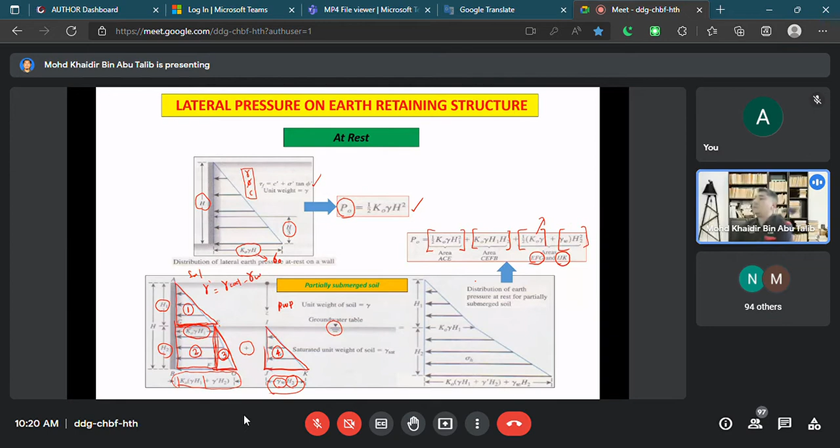Okay, this is example for at rest condition. Figure 13.6 shows a 4.57 meter wall, from A to C, that means the total height of the wall, and the wall is restrained from yielding. Restrained from yielding maksudnya at rest, no movement. Calculate the lateral force P0 per unit length of the wall, also determine the location of the resultant force, which means Z bar.

Assume that for sand OCR equal to 2. Dari previous class kita dah tengok macam mana estimation of the K0. Antaranya yang popular ialah Jaky equations, dan kita ada juga Jaky on sand, and we have Kulhawy and Mayne and so on. Dalam kes ini kita guna yang over consolidation ratio punya equation. Since given OCR equal to 2, kita masukkan 2, and from this figure kita dapat tahu phi is 30. Since phi is same 30, we assume we have a same soil, same phi. Kita masukkan phi 30, include OCR 2, power sin 30, kita dapat K0 equal to 0.71.

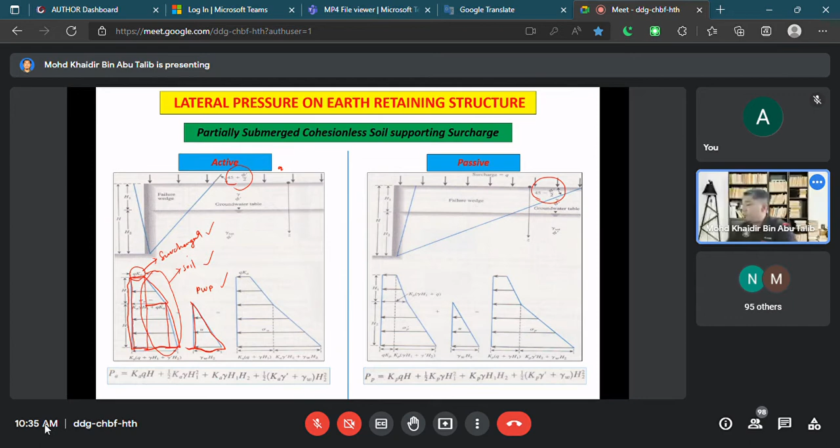Okay, let's look at an example. A 5 meter high retaining wall shown in the figure. Determine A, the Rankine active force, meaning force PA per unit length of the wall and the location of the resultant, Z bar A, for active. Then also PP, the passive force, and ZP. So PA, ZA, PP and ZP.

Since C equals 0, it means it's cohesionless. So the formula for the active is this, which is... this. Gamma Z here is sigma naught.

So first, to calculate this we need to determine the coefficient of active lateral pressure, KA. We have phi equal to 30 degrees, using this equation, or another equation you can use is tangent squared of 45 minus phi over 2. Either can be used, so we can use this one. So 1 minus sin 30 over 1 plus sin 30, and we obtain 0.33 for KA.

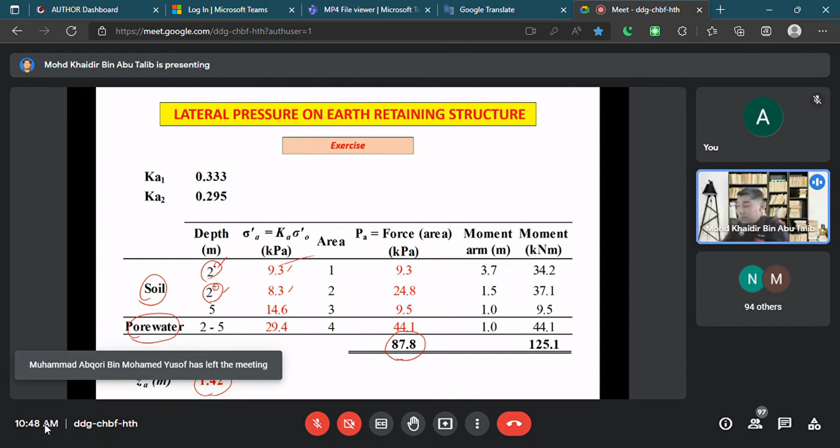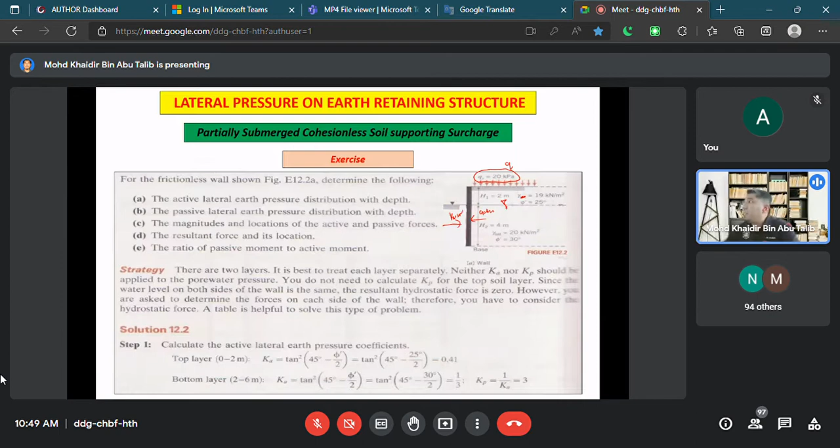Jadi dalam slide yang saya share, dia dah tunjukkan the way we calculate to determine all the required answer, dengan detail calculation dalam slide ni. Tapi saya nak tunjukkan how we can solve this problem dengan menggunakan table cara kita sebelum ni. Hopefully you can take part in this calculation. Kita try, ini sebenarnya soalan ni sebenarnya, so saya simplify dalam bentuk lukisan yang macam ni.

Since we have a different phi, we have phi equal to 25 and phi equal to 30. Jadi KA1 sama dengan 1 minus sin 25 over 1 plus sin 25. Yang ni pula kita akan dapat 1 minus sin 30 over 1 plus sin 30.

Dekat sini kita dapat 0.33. Yang kat sini kita akan dapat berapa? 0.41, okay 0.41, ataupun dia punya exact. Saya lebih prefer you use 3 decimal, kalau 3 decimal ni dia akan lebih tepat untuk KA, so you use 3 decimal point. Jadi kat sini 0.406.

Sekarang kita tengok by depth. Since we have a surcharge, kita pecahkan kepada 3 parts: we have surcharge here, then we have soil part, then we have water pressure part. Jadi untuk surcharge sahaja, pada kedalaman 0 ke 2 meter dan 2 hingga 6 meter, dekat sini kita ada KA kalikan dengan sigma naught. Jadi KA first kita guna 0 to 2 meter kita guna KA1, untuk 2 to 6 meter kita guna KA2. Okay kelas, saya rasa boleh try kira dulu.

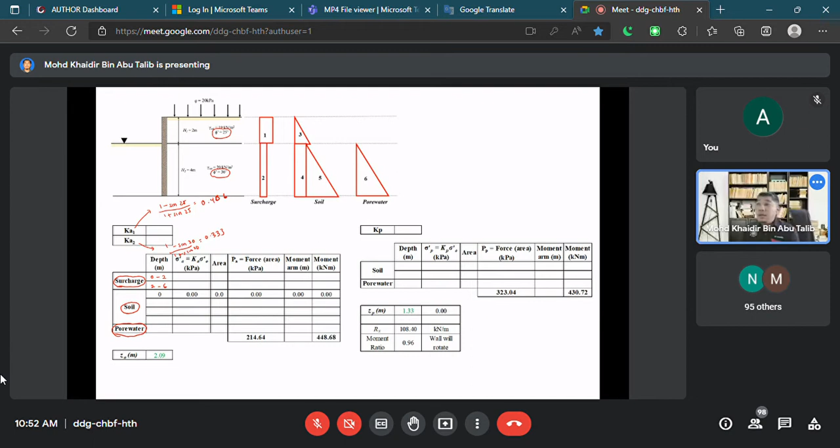So berapa yang awak dapat untuk first? So saya pun nak kira juga. So KA 0.40. Okay, since untuk overburden pressure dekat sini dia sama dengan kosong, pasal apa? Ini kita cuma ambil kira berkaitan dengan surcharge sahaja.

Jadi apa yang kita buat ialah dekat sini KA kali dengan Q, ataupun Q kali dengan KA untuk surcharge ini. Jadi Q sama dengan 20 darab dengan KA1 ialah 0.406. So untuk yang ni pula, Q KA2, so we have 20 times 0.333.

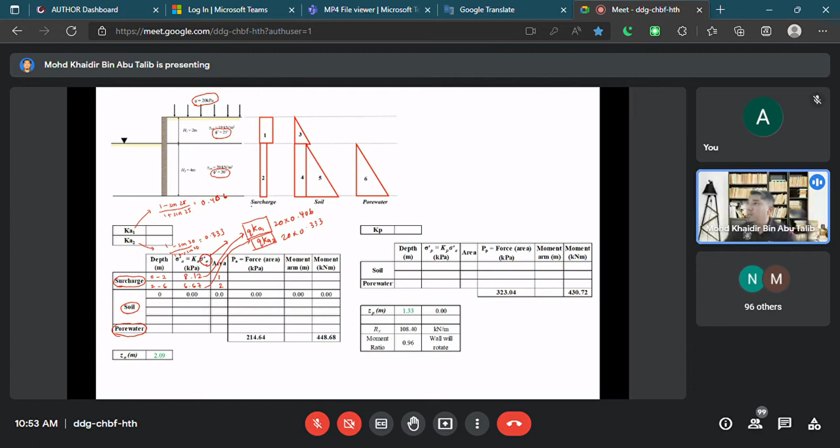Jadi apa yang kita dapat kat sini is about 8.12, and the second one we get 6.67. Dan ini adalah area 1, ini adalah area 2. Jadi kat sini kalau awak tengok, saya pecahkan pada 3 part: surcharge, soil, water. Jadi for surcharge, area 1 dekat sini adalah 8.12, and the second area adalah dia punya ujung ni adalah 6.67.

Okay, now we try calculate for the soil part. For 0 at 0, semua kosong. And 0 to 2 meter, at 2 meter kita buat kat sini tadi minus plus. Minus plus ni maksudnya yang tadi untuk area 3 dan 4. Yang ni untuk area 1, area 2, area 3 dan area 4. Jadi area 3 dengan area 4 ni, yang 3 ni okay kita direct je. Untuk KA ialah kita kalikan dengan KA1.

Jadi kita dapat KA1 gamma 1 H1. Kemudian untuk yang ni pula, KA2 gamma 1 H1. Ni yang bezakan dia ialah 3 dan 4, KA1 gamma 1 H1. So for this, kita times lah KA1 gamma 1 H1. So KA1 0.406 times 19. Sorry, this is not sat, this is dry area.

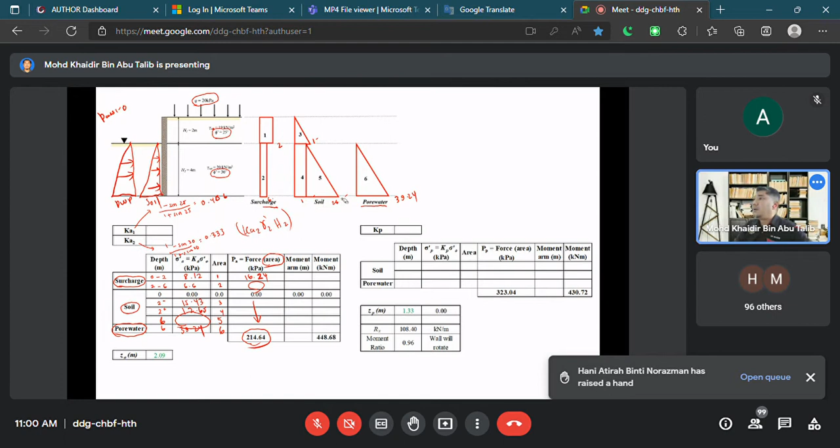Doktor, ya saya. Maaf, saya nak tanya boleh? Boleh, tak ada masalah. Yang satu, 2 plus tu dari mana ke mana doktor? Saya kurang faham. Yang untuk slide depth tu, kan dua negatif and then 2 positif, dan dia dari mana ke mana? Sebab saya kira saya tak dapat 12.65 tu, saya salah masuk depth dia.

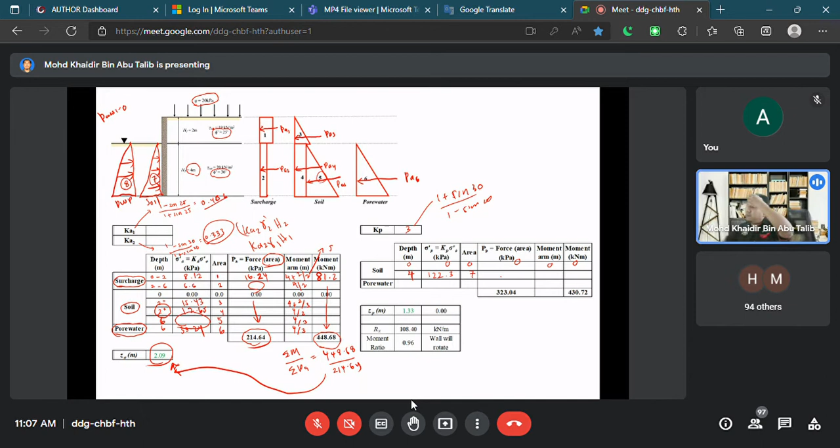Kemudian dia punya force equal to 244.6, pasal 122 times 4 divided by 2 lah, kita akan dapat 244.6. Moment directly 4/3, and kita harapkan dengan ni dan kita akan dapat lebih kurang 326 kat sini.

Untuk water pressure pun 4 meter. Kita kat sini kita dapat sama macam kat atas tadi, 39.24. Ini area nombor 8, jadi dekat sini kita akan dapat 78.5. Ini pun 4/3 dan kita akan dapat kat sini, dan kita akan dapat jumlah kat sini.

Dan hasil bahagi 2 ni kita akan dapat ZP. Jadi untuk these cases sebenarnya kita tak payah bahagi 2 ni pun tak apa, pasal dia hanya melibatkan triangle. So 4/3, awak akan dapat 1.333. Jadi kalau bahagi pun biasanya akan dapat yang sama lah. So ZP equal to 1.333.

So Rx ni hasil tolak PP, Rx adalah PP tolak PA. The moment ratio is the PP over the total moment, P over total moment M A aktif. So yang ni adalah ni.

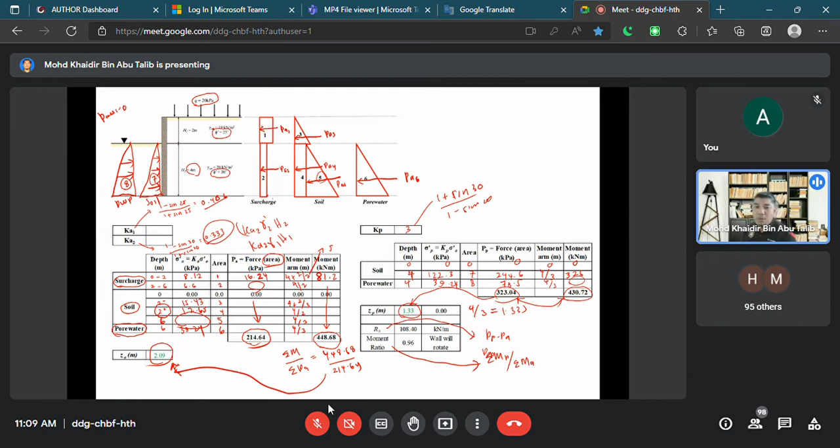Okay. Ini sebenarnya yang dia buku punya calculation method lah. Dia okey sebenarnya, tapi pada saya macam kalau tak faham ni dia payah sikit lah. So basically kalau awak guna table yang ni, saya rasa insyaAllah lebih mudah untuk awak faham dan lebih mudah untuk awak check dia punya calculation.

Tadi macam ada kawan tadi kan dia tanya how can we get 12.65 at 2 plus layer tu kan. Jadi kita tahu kat mana yang kita tak dapat tu. Okay, ini nanti awak check lah. Ini yang jawapan-jawapan dia lah. Suppose ni memang akan sama lah dengan yang kita dapat ni.

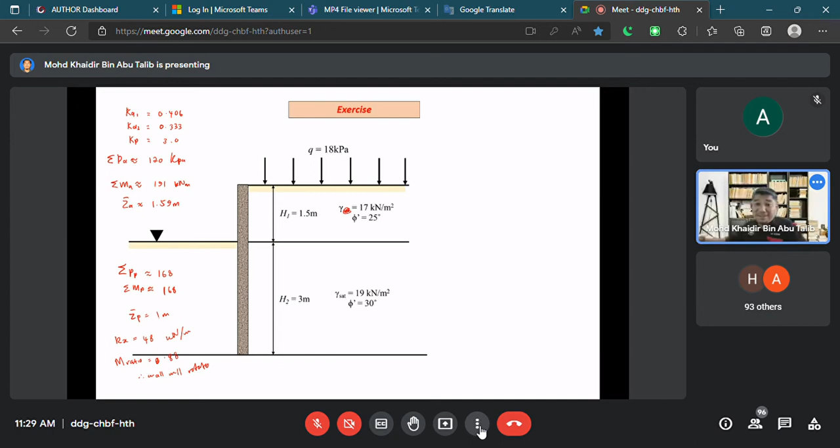Okay kelas, harap dah mencuba. Hari ni kita keluar bernasib baik lah, kebetulan ada construction kat depan bilik saya. Jadi hopefully awak still boleh dengar sikit-sikit. Saya pun sekarang terganggu dengan bunyi tu, tapi tak apa, kita teruskan.

So dekat sini saya dah letakkan jawapan untuk question ni. The total of the lateral active pressure is 120 lebih kurang, and for the moment active lateral force approximately 191, and for the Z bar active is 1.59, dan begitu juga dengan for the passive part. This part is for passive. This is the difference between the PP and PA, and the ratio of the moment passive and active, so it's 0.8, and finally since the active exceeds the passive, the wall will rotate.

Okay nanti check, boleh try terus. Ke ada yang dah siap sampai habis? Ada tak? Ke masih mengira? Masih mengira? Okay it's okay, nanti awak boleh sambung lah anytime untuk this part.

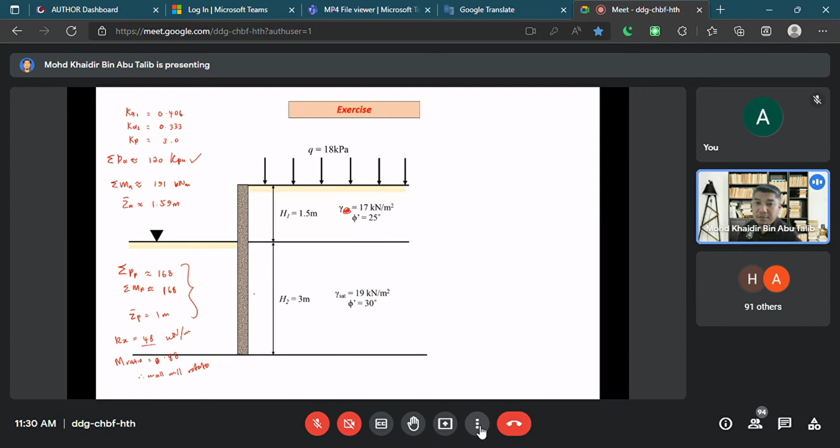Okay, sekarang kita dah cover all the part in cohesionless soil. Sekarang kita nak tengok pula in the condition is cohesive. The cohesive means the C is not zero, maksudnya dia ada C lah. So we have a cohesive parameter for this soil.

Once we have a cohesive part, it would be separate into two conditions that we call it as drained and undrained condition. So what is drained conditions? Drained condition is when we have a phi value, phi is not zero. This is drained condition. While for the undrained condition, the phi is zero.

Jadi hopefully you still remember how soil shear strength determined from the lab test. Tau equal to C plus sigma tangent phi. Kalau kita buat guna undrained unconsolidated, ataupun UU undrained unconsolidated test, then we get a straight line. Kita ada dapat macam ni, hopefully ingat lah, so this is tau, this is C, and phi equal to 0. This is we call it as the undrained condition.

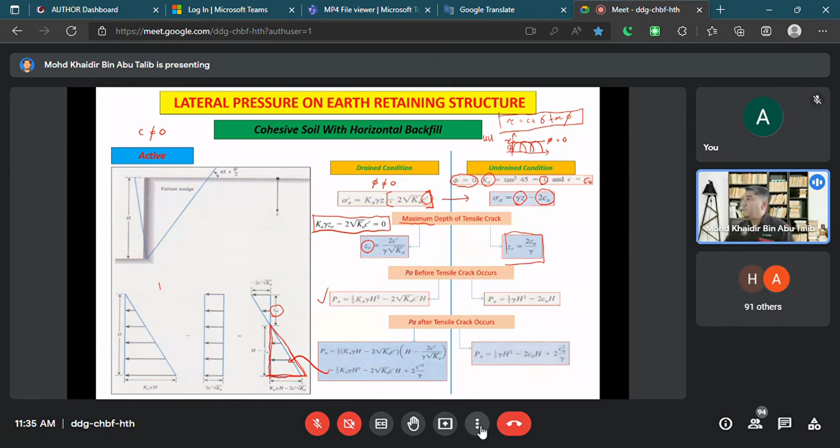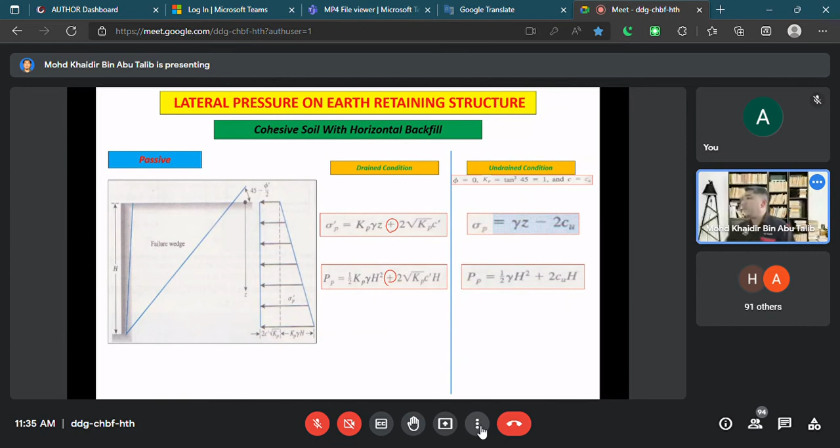Kalau yang ini Ka tak ada, so kita simplify this equations into this equations. For the passive sama juga, the difference is only on the sign. We have minus here, but here if we get a positive sign, similar.

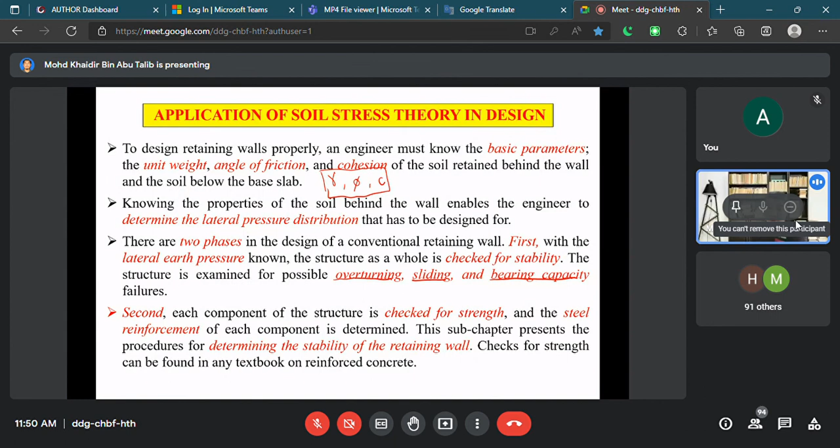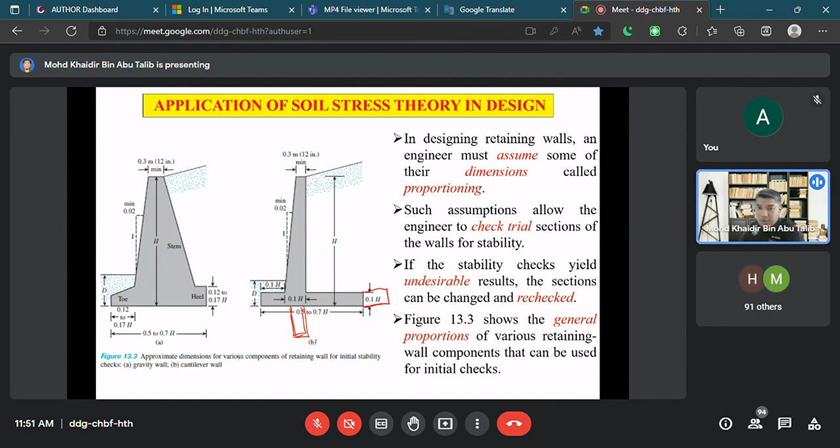So if it's not stable, then you have to decide lah whether kat mana nak buat. You nak kena panjangkan this part ke, you nak panjangkan lagi this part ke, you nak kena tambah sikit anchor kat bawah ni ke. Many ways lah to increase the stability of the wall.

Jadi this is how the Rankine active pressure yang kita buat tadi, PA apa benda semua tadi tu. So ini macam mana dia punya application in soil stress distribution punya calculation. So kita assume dekat belakang wall ni ini adalah distribution of the stresses. Yang ni sebenarnya dia punya detail, basically if you further your study in civil engineering master for the master, ni part of.

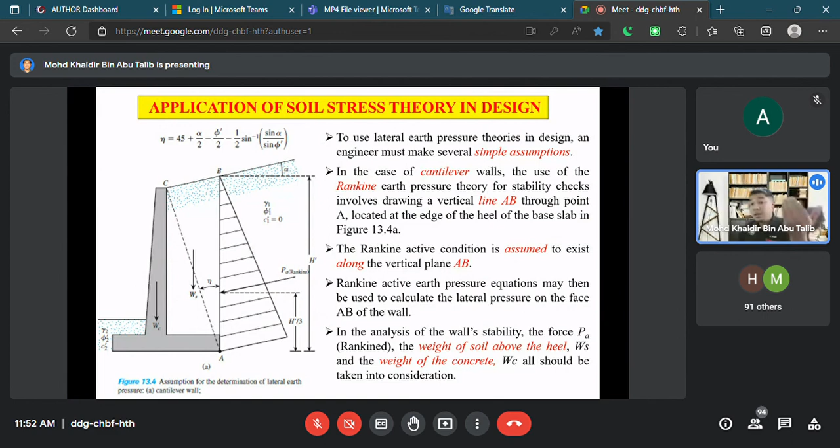Saya pun ada ajar juga for the master students, jadi this is part of the syllabus for geotechnic. Jadi macam mana kita nak determine the safety of the wall structure tu sendiri. Okay, tak apa, ini kita know the application dulu. So untuk kira dia, ni untuk similar lah for the gravity wall. Dia pun gunakan lateral stress yang kita belajar tadi.

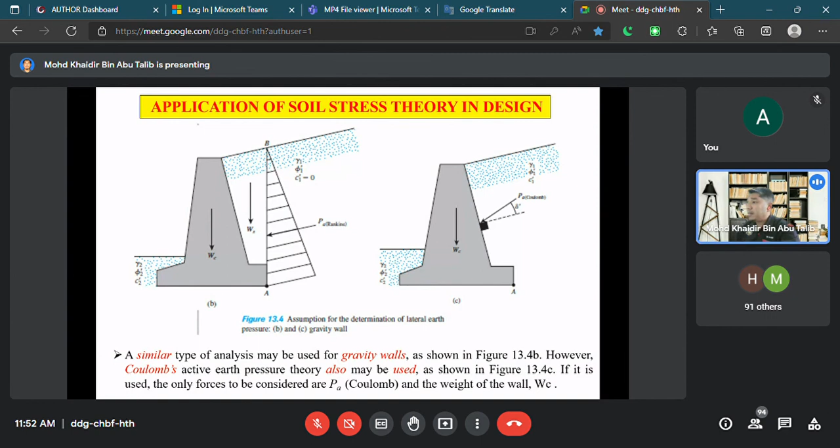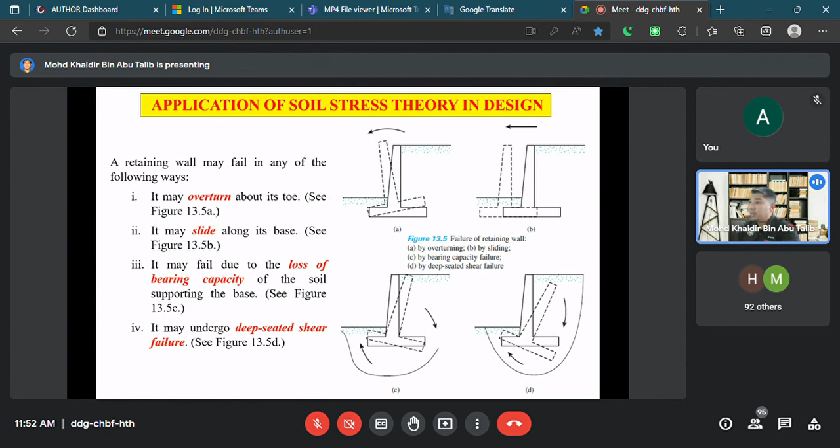Okay, this is the failure type. Tadi saya cakap basically we have main three type: overturn, slide and bearing capacity. And fourth one is rare, but it could be happen kalau kita terlepas pandang during the SI, site investigation. We call it a deep-seated shear failure. Deep-seated shear failure ni sebenarnya kita ingat tanah kita jumpa tu okey dah.

So our wall, they sit at the good soil, but the intermediate layer yang dekat tengah ni, dia ada jumpa dengan katakan the thin layer of the weak soil. Jadi on that time lah dia akan slide pada yang thin layer tadi. So once it slide at the thin layer, the wall will be rotate. Ini yang bahaya pada deep seated. Deep seated ni kadang-kadang dia boleh berlaku pada difference of geological feature dia. The geological feature dia berubah. Itu dia boleh menjadi deep seated.

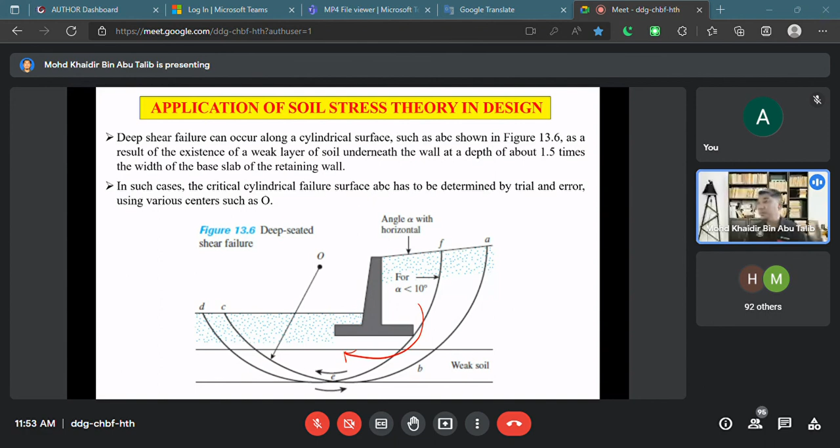Okay, kelas sampai rasanya sampai sini untuk our chapter 13. We finish our chapter 13.

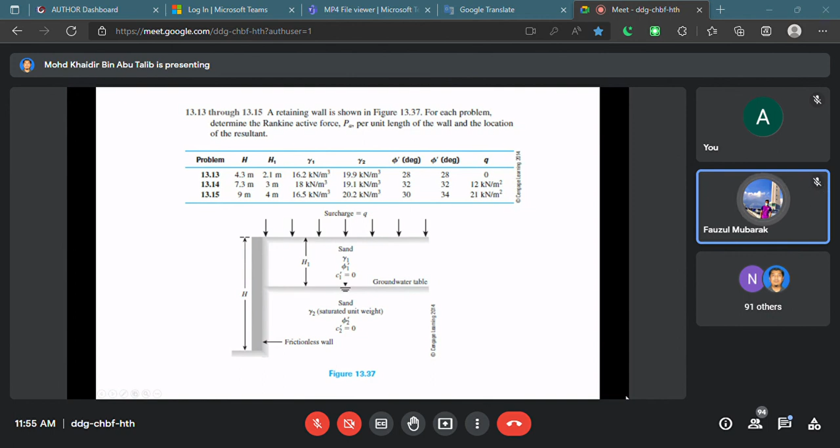Terima kasih Doktor. Terima kasih Doktor. Selamat Raya. Thank you, Doktor. Selamat Hari Raya. Selamat Hari Raya. Thank you, Doktor. Thank you, Doktor. Hi, welcome. Thank you Doktor. Hi, you're welcome.